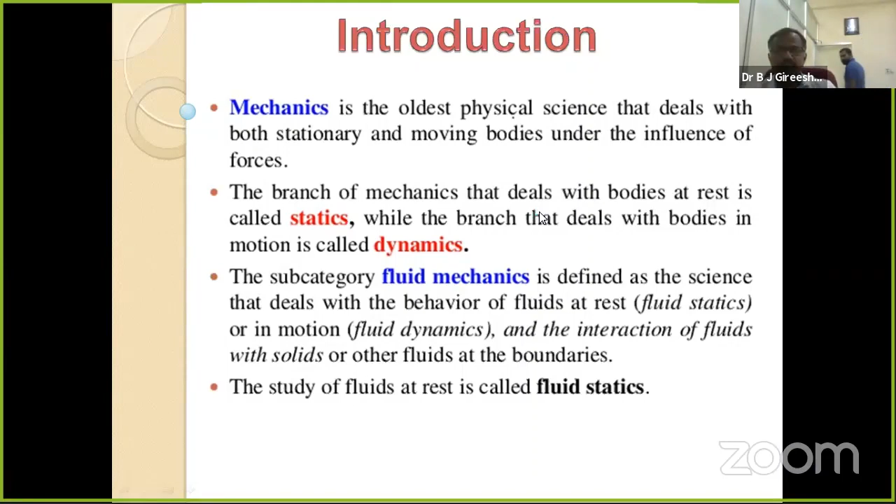So now we have to think about—sorry for the interruption—what is fluid? As you know, the substance exists in three phases: solid form, liquid form, and gaseous form. Here we are going to take both liquid and gaseous form as fluid, right? So again, fluid we are going to classify as compressible and incompressible.

Compressible is taken as gaseous structure, and incompressible—liquid comes under incompressible fluids, right? So here there will be difference between liquid and gaseous state, gaseous phase. In liquids, the cohesive force is more, but in gaseous structure the cohesive force is very less.

Here deformation occurs more, but in case of solids we can't find the deformation. There will be a certain stage, up to that stage only the deformation occurs, and after that it ceases to deform. Take a rubber band—you can stretch it a certain extent, and if we stretch more, then it ceases to stretch and it breaks. This means the deformation will not take much in solids, whereas in case of fluids, it deforms continuously under the action of forces—meaning stress is directly proportional to strain rate.

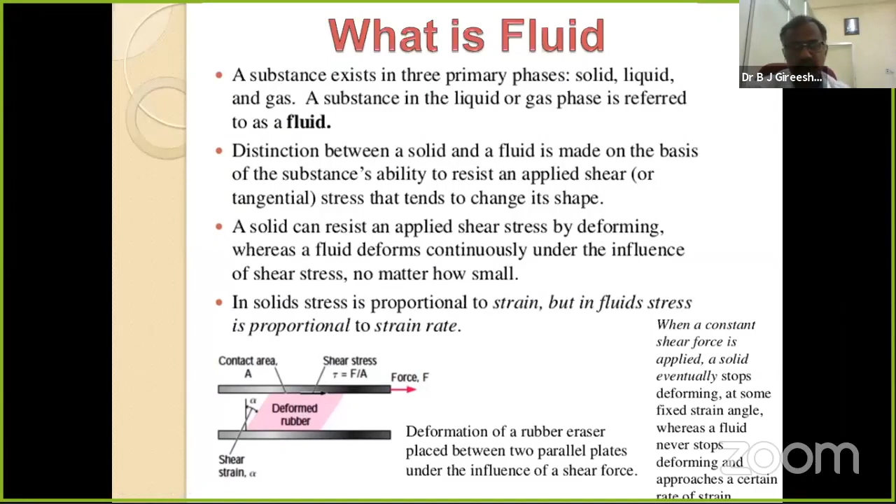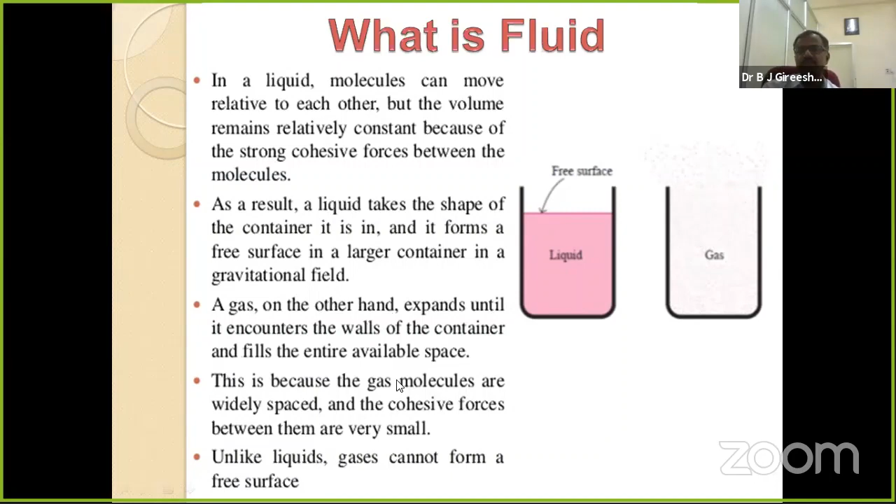I'm not going to concentrate much on what is fluid and what is gas. Fluid, or liquid, occupies the shape of the container, but space remains after its capacity. Whereas in case of gas, it occupies the whole space of the container. It has exact volume in liquid, but in gaseous state that's not possible because it occupies the whole space of the container. Those things I think you have studied, so we can pass and discuss applications of fluid mechanics in the next slides.

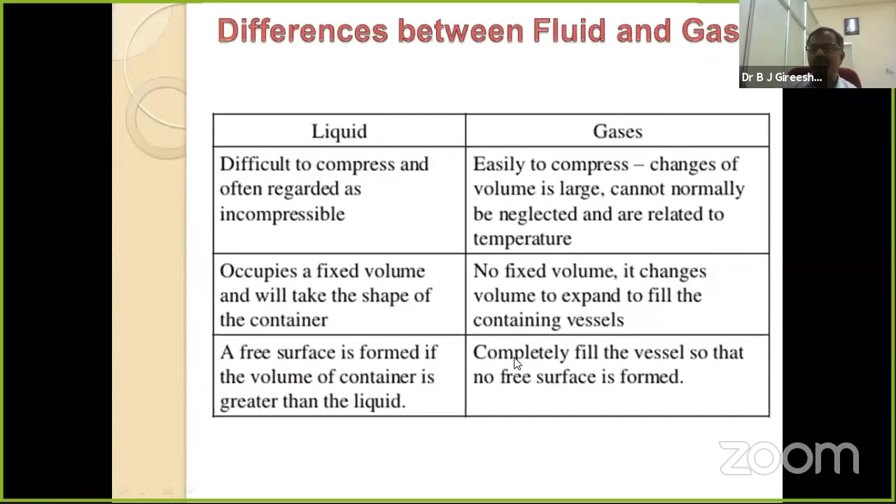These are the differences between fluid and gas. Liquids are difficult to compress, often regarded as incompressible. Whereas gases easily compress and change volume to a large extent. Liquid occupies a fixed volume, whereas gas occupies the whole space of the container. Free surface is formed if the volume of the container is larger, but in the gaseous state, it occupies the whole space of the container.

Applications of fluid mechanics. In all branches of engineering, we come across fluid mechanics. In mechanical engineering: design of pumps, turbines, air conditioning equipment, pollution control equipment, etc., and design and analysis of aircrafts, boats, submarines, all those things. Also in radiators of vehicles and bikes. So in almost all fields of mechanical engineering, it has its own applications.

Also in civil engineering: transportation of river sediments, pollution of air and water, design of piping systems, flood control systems, and others. So you can find the applications of fluid mechanics in civil engineering also. In chemical engineering too, you can find applications like design of chemical processing equipments.

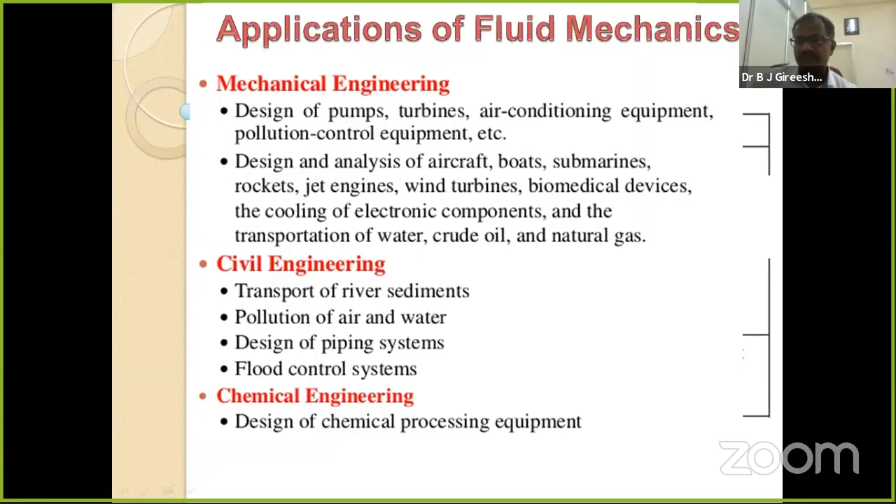In turbomachinery, in military, in automobile, in medicine field, electronics, energy, oil and gases - in all fields of engineering you can find applications of fluid mechanics. At last, everything in our world is either in contact with, or in the form of, liquid or gaseous state. That's why fluid mechanics is a very important branch in the field of mechanics as well as physics and mechanical engineering. It is a very important branch.

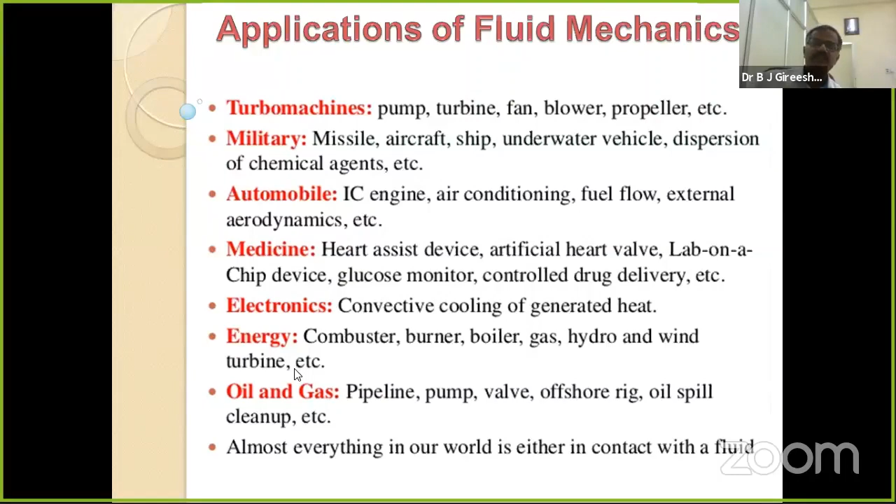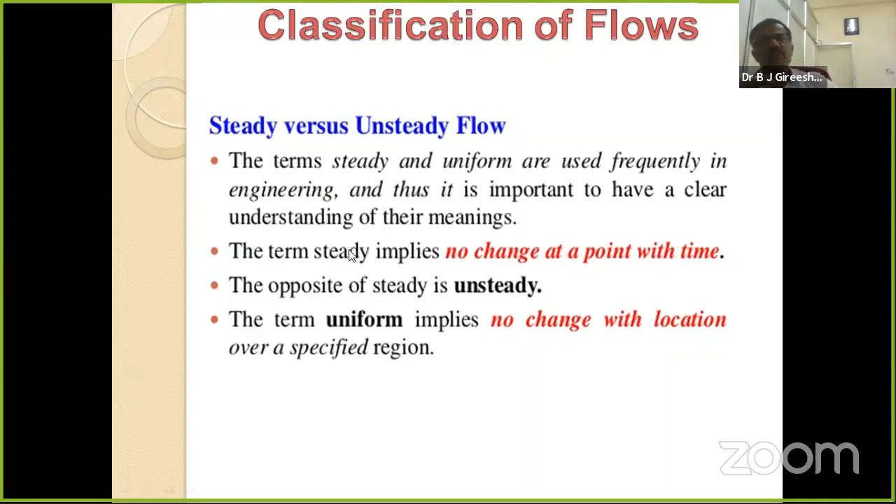Now we can classify the flows. To study this, we have to classify. There are majorly two kinds: one is steady flow and the other is unsteady flow. Steady flow means the flow parameters like velocity, temperature, density, viscosity, pressure, and all those things do not depend on the time variable, do not change with the time factor - that flow is known as steady flow. If they depend on the time factor, then it is known as unsteady flow. The term uniform flow means no change with location over a specified region, and that is so-called uniform flow.

You can find different kinds of fluids: ideal fluid, real fluid, Newtonian fluid, non-Newtonian fluid - different kinds like that. Ideal fluid is only imaginary, you can't get it, because it should not have any viscosity, so there will be no viscosity. It is not possible to find a fluid with no viscosity, but for the sake of reference we consider water. But even water has some sort of little viscosity, though it may be very less. That's why it is only an imaginary fluid.

Real fluid means any fluid which possesses viscosity is known as real fluid. Newtonian fluid and non-Newtonian fluid - the classification depends on Newton's law of viscosity. What do you mean by Newton's law of viscosity? The shear stress is directly proportional to the rate of shear strain. Then you should know what is stress and strain.

What is stress? Stress means the capacity of the force developed per unit area of the body, the capacity to develop unit force in the given body. Because if you stretch a rubber, it has to take the original shape. To take the original shape, it has to develop the internal force to get the original shape. That is so-called stress.

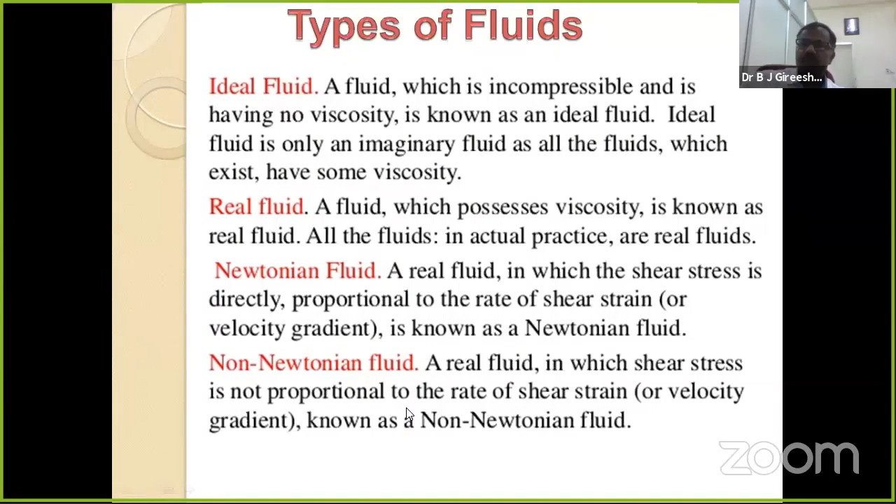Non-Newtonian fluid, right? Next.

To study the flow patterns, you should know what are streamlines, vortex lines, streak lines, timelines, and those things. Streamline means if you draw a curve for the particles of the fluid, the tangents to that curve at each and every point will be in the direction of the velocity vector.

If you draw a curve in the fluid, the tangents to it at each and every point of that curve should be in the direction of velocity. Then we call that line a streamline. If the direction of the tangents is in the form of the vorticity vector, then it is known as vortex lines, okay, like that.

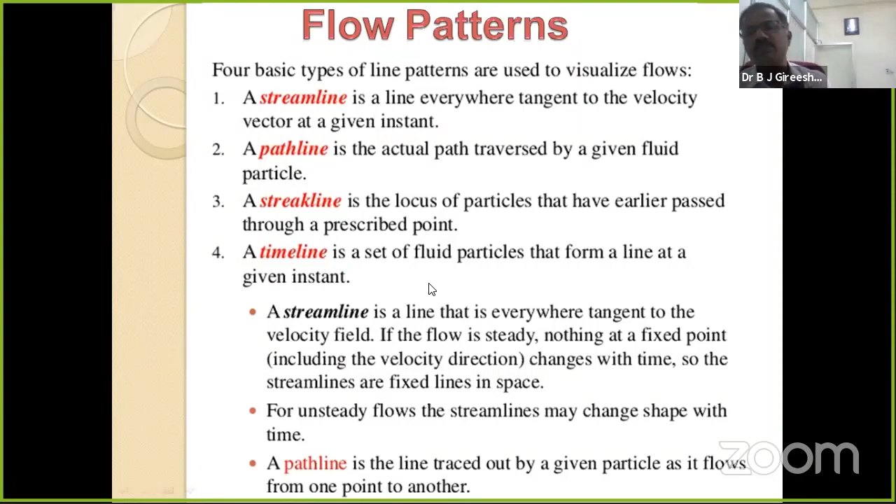So streamlines, path lines, streak lines, timelines—we take these different concepts because to study the flow patterns, they are very important concepts. Next, please.

Now come to the basic equations of fluid mechanics. For the beginner's purpose, I'm going to take only two equations: one is the continuity equation and the other is the momentum equation. I'm not going to take the energy equation, magnetic induction equation, concentration equation, and all those things, to explain in a simple form.

One is the continuity equation: mass can neither be created nor destroyed. It is given by del rho by del T plus divergence of rho into V equals 0, where rho is the density of the fluid and V is the fluid velocity.

The momentum equation is given by: the sum of the forces acting on the fluid must be equal to 0. The resultant equation is given by rho into del Q by del T plus Q dot del of Q equals minus gradient of P plus rho into G plus mu into del square Q.

I think you know the terms, each and every term. Rho is density, Q is taken as velocity of the fluid, and P is the pressure. G is the gravitational force and mu is the viscosity term. The first term del Q by del T gives the momentum term, Q dot del of Q gives the inertial force, gradient of P gives the pressure force, rho into G gives the body force, and mu del square Q gives the viscous force.

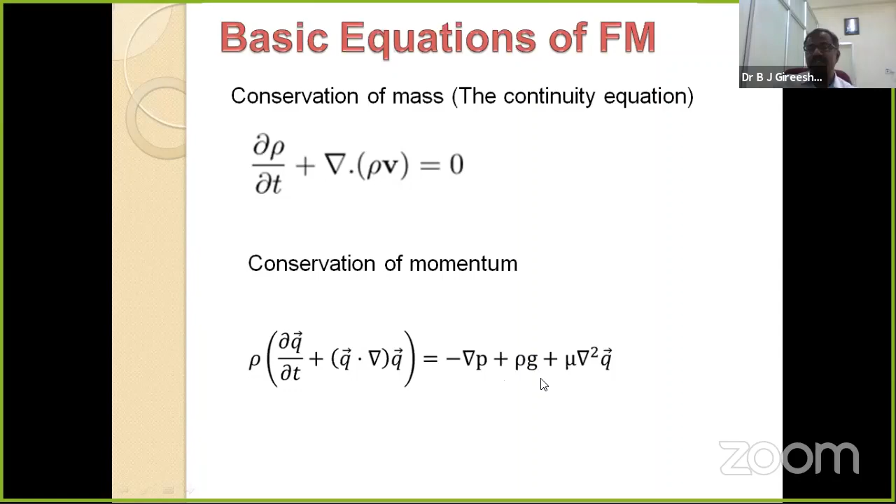So the best example is the Couette flow. Next please. The Couette flow is the first solution for this equation. It is named in honor of the mathematician. He was the physics professor at the University of Angers, from France, in the 19th century. He found the solution for this equation under some restrictions.

So what are the restrictions? He formulated the problem such that the fluid is viscous and the flow is between two infinite plates, where one plate is moving and the other is constant. Or you can take both plates as constant also, that also becomes Couette flow. But to trigger the flow, there will normally be a pressure gradient. By not considering the pressure gradient, just by moving the plate, we can trigger the motion. That's why he has taken one plate moving and the lower plate stationary, then the flow takes place, and we can see how the flow pattern will look like. Next please.

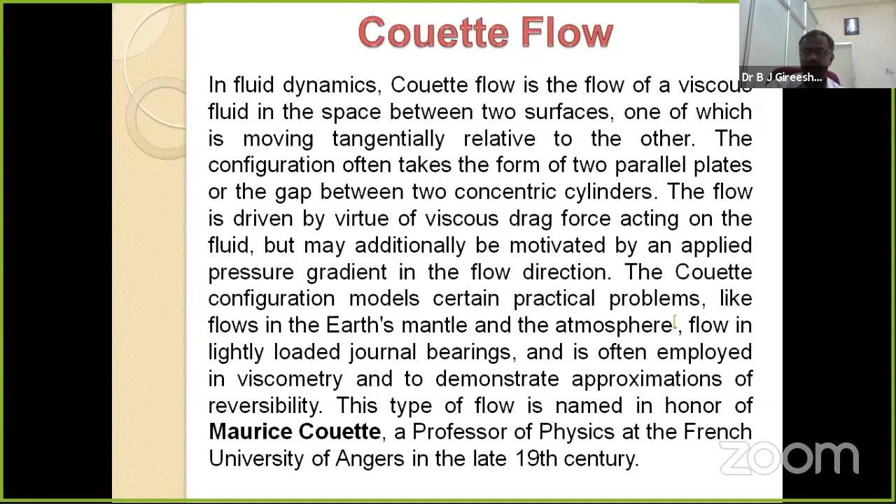So you can see here, one upper plate is moving with capital U, uniform velocity, and the lower plate is stationary. Between the two plates, they are separated by a certain distance h.

Here the pressure gradient is absent, there is no inertial force, no time variable since we have taken steady flow, and the gravitational force is absent, meaning conservative body forces. So the original equation reduces to only the viscous term: mu into del square Q is equal to zero.

But in Q, you can find three parameters: U, the velocity component along the x-axis, V along the y-axis, and W along the z-axis. Here we are studying flow that takes place only along the x-axis, so there is no V or W, meaning Q becomes U into I only.

U is a function of four independent variables: time and position variables x, y, z. The length of the channel is not known, it is infinite length, so I'm not considering that variable. The depth of the channel is also not known, so I'm not considering that either. I know only the width of the channel, so there is only one variable, and it is time-independent because it's steady flow. That's why it is a function of only the width of the channel.

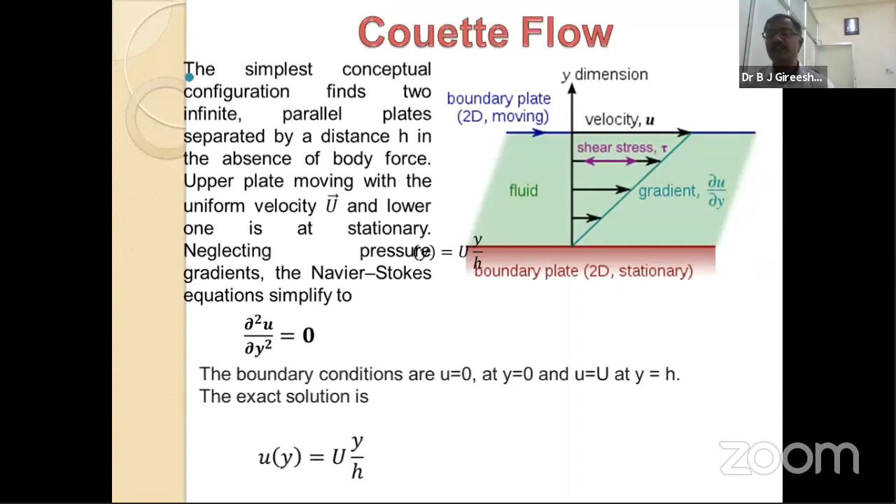Next, you can study this further by increasing the complexity of the concepts, like considering a pressure gradient, or gravitational force, or taking unsteady flow. By complicating the equation further, mathematicians and physicists try to find the analytical solution in different forms at different stages, and they find the solution.

Next, please. Again, Couette flow is taken, but now the pressure gradient is considered.

Plate is moving, the flow is triggered by the plate, but here pressure gradient is also considered. By taking the pressure gradient into account, the equation becomes a little different. Because pressure gradient comes into the picture, it's a non-homogeneous equation. You get del square U by del y square minus P by mu, where P is taken as a constant pressure gradient.

Now the equation reduces to a non-homogeneous ordinary differential equation, and the boundary conditions are the same. At the lower plate, velocity is 0. At the upper plate, it equals the velocity of the plate.

By solving the equation, you can find the solution at the last, U(y) is equal to like that. Here there will be one small mistake at the last term: small u into capital Y by h, but that is not small u. That will be capital U into Y by h.

So if the pressure gradient is absent, meaning P is equal to 0, then the solution is valid with the previous one. If P is equal to 0, then only the velocity term capital U into Y by h remains. It is nothing but the previous Couette flow.

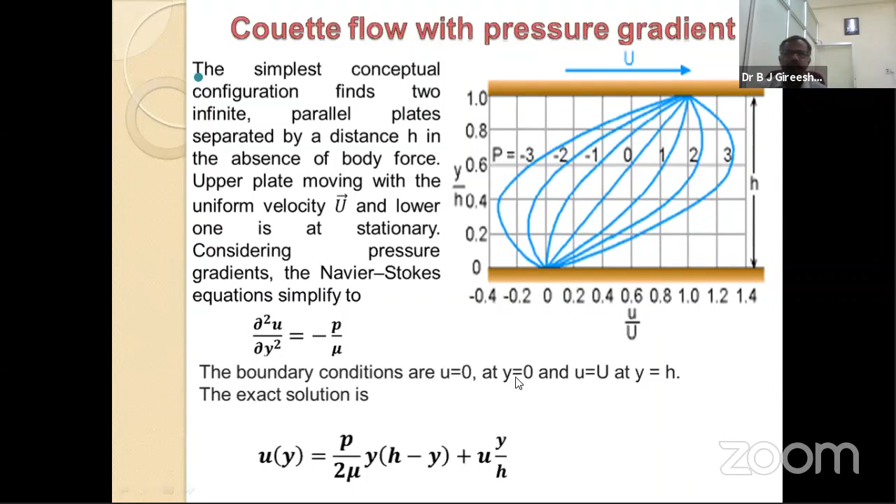Next, unsteady Couette flow. Up to this stage, we had increased one parameter, that is pressure. In this problem, we increase one more parameter, that is the time variable. In those two studies, we only come across ordinary differential equations.

But here, the independent variables are more: one is the position variable y, and one more is the time variable t. Now the equation becomes a partial differential equation, and we have not taken any pressure gradient. If we take pressure gradient, it becomes a non-homogeneous partial differential equation, much more complicated compared to this problem. Here the pressure gradient is absent, it's simply an unsteady problem, so the equation becomes a second order partial differential equation, homogeneous and linear.

Since it is homogeneous and linear, we can find the solution very easily using separation of variables, Laplace transform method, Fourier transform method, eigen expansion method, or any kind of such methods. So you can find the solution.

You can observe that when the time variable comes into the picture, there will be an initial condition along with the boundary conditions. The initial condition is at time t=0: we have not started the flow, so the velocity is 0. That is, u(0, y) is equal to 0. That is the initial condition, and the boundary conditions are the same as in the previous cases.

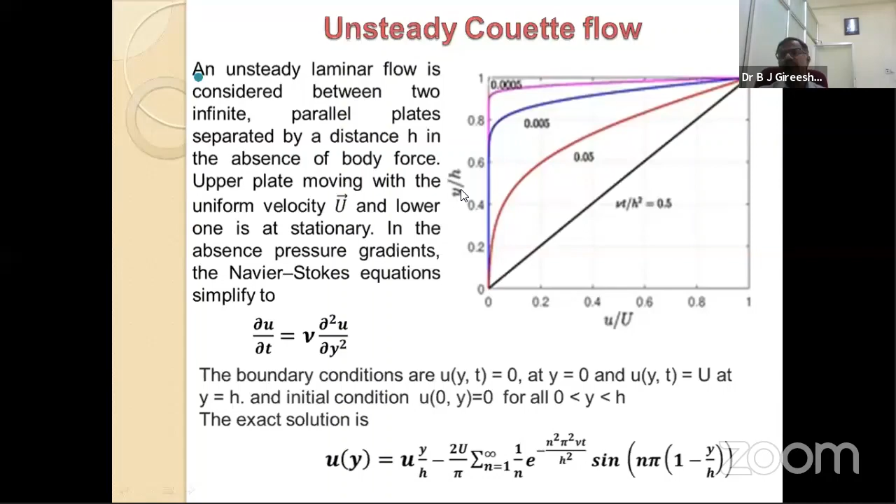So you are going to get the same equation, but in the form of polar coordinate system, cylindrical polar coordinate system, and the flow pattern must be the same. Poiseuille flow, plane Poiseuille flow, Hagen-Poiseuille flow, and all those things are related to Couette flow only.

But Stokes considered a different problem, meaning it must be unsteady in the absence of pressure gradient, no inertial force, no gravitational force, same as in Couette flow. So the equation becomes the same thing, but here he has taken only the lower plate, no upper plate.

He has not taken the upper boundary. There, y is equal to 0 and y is equal to h, but his h is not there. It is open space, only the lower plate is there. At y equal to 0, but at the top y tends to infinity, meaning we don't know the height of the channel. Then the boundaries become different.

He has taken u of y comma 0 is equal to 0, that is the initial condition, and u of 0 comma t, meaning exactly at the surface, it must be equal to the velocity of the plate. That's why the plate velocity is taken as capital U. Only at the bottom the plate is moving.

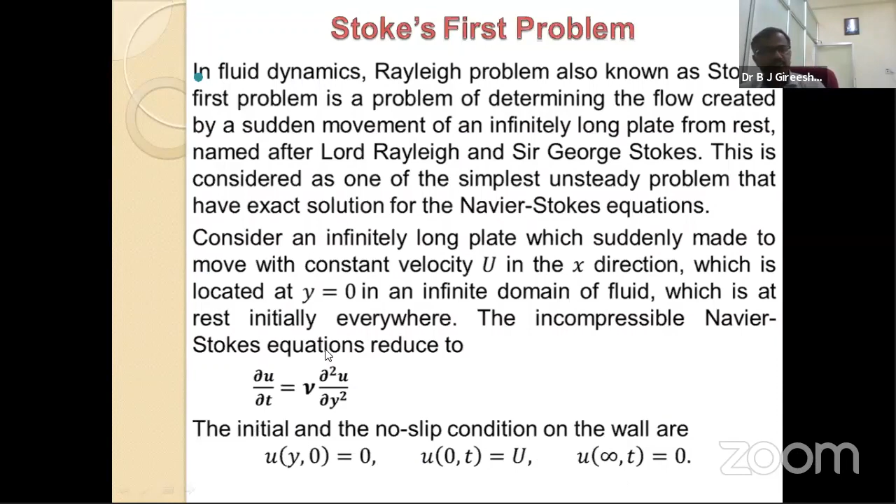By solving this equation, you are going to get the solution. But to solve this equation, they have adopted a different method. You can use any method, but they used the self-similar variable method, meaning similarity transformation method.

We define a new variable with two variables x, y and t. We define a new variable eta, given by a certain expression. By defining those variables, the partial differential equation reduces to an ordinary differential equation, that is f double dash plus 1 by 2 into eta into f dash equal to 0. This is a second order ordinary differential equation with variable coefficients, not constant coefficients.

If they were constant coefficients, it would be very easy to find the solution by finding the characteristic roots of the polynomial. But here, with variable coefficients, it is a little difficult compared to that.

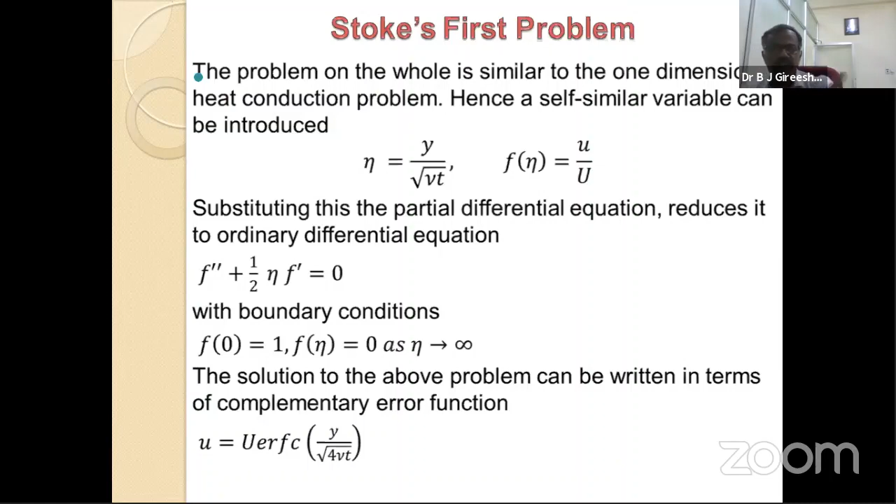So before going to this, I think one guy from Andhra Pradesh called me 3 days back regarding the elliptical boundary conditions. Sir, if the region is rectangle, no problem, we can find the boundary, we can fix the boundary. If it is square, we can fix the boundary. If it is cylindrical, circular cross section, then we can fix the boundary. Then if they don't have the circular or rectangular shape, then what we have to do?

Like the cross section is elliptical form, cross section is hyperbolic form, cross section is triangular form, cross section is parabolic form, then the flow pattern becomes different. Because in circular case, as radius changes at every point, it denotes at each and every point. In ellipse, there will be 2: one is major axis and another one is minor axis. In the similar case, hyperbola also. In triangle, for this side is different, for this side is different, and for this side is also different. That's why you can find different boundary conditions there.

I had these boundary conditions in one more slide. Actually, that is not shared here. I don't know, at the last I will try to show you how you have to consider the boundary conditions for those also. Actually, those who want, please go through with Y.B. Reddy, he has published the paper.

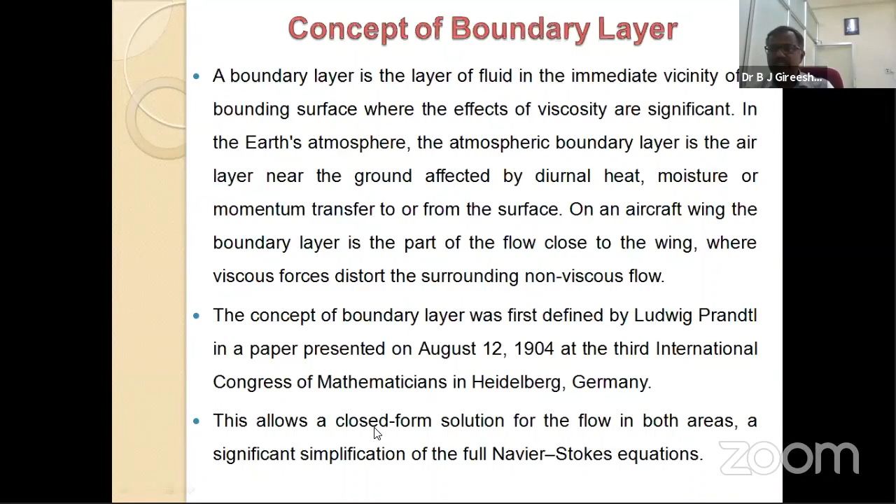Using these concepts, he derived new equations, using the same Navier-Stokes and momentum equation. So he reduced the equation into certain boundary layer equations. Let us see how they are. Please, next. Boundary layer, next please.

So I'm not going to show all those things because it's a big calculation. He reduced the equation into this simple form. Even this is also a non-linear partial differential equation. Observe the second differential equation - that is a non-linear second order partial differential equation. Itself, this is also difficult to find the solution. But he has not succeeded to find a solution for this equation.

But his student, Blasius, in 1908, reduced this equation to some easier extent, and then he found the solution, and that is known as Blasius solution. Blasius was the student of Prandtl.

So in 1908, for this equation, he tried to find the solution, but he reduced the solution to some extent, meaning he assumed that capital U is constant, then the term disappears for that equation. So he found the solution using method of series solution. That is also not fully closed form solution. He found only a series solution, semi-analytical solution, in the form of series. Blasius only found the solution in the form of series in 1908.

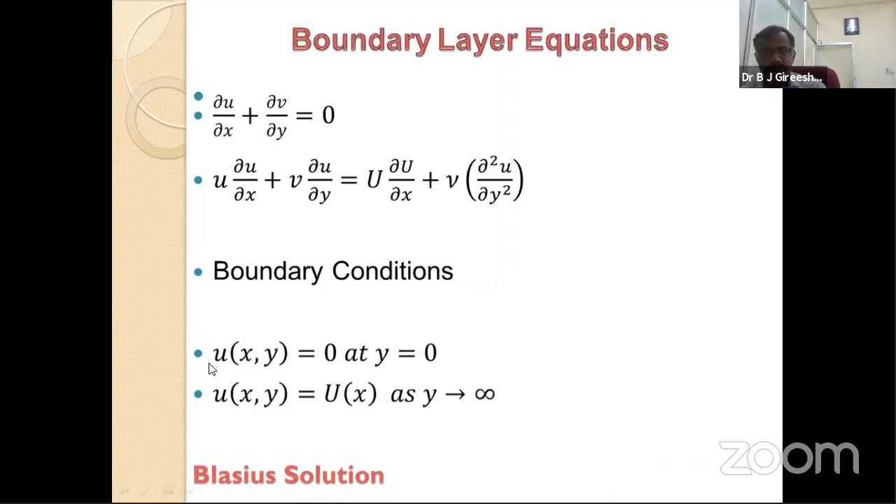So now, based on these equations, Stokes found the solution for the flow problem. Here, instead of taking the simply moving plate, he has taken the oscillating plate, with some oscillation omega - omega is the frequency of oscillation. So that oscillation is considered as U into cos omega t in x direction. This is the plate, so it is oscillating. Due to this oscillation only, the flow takes place, and for that flow he found the solution.

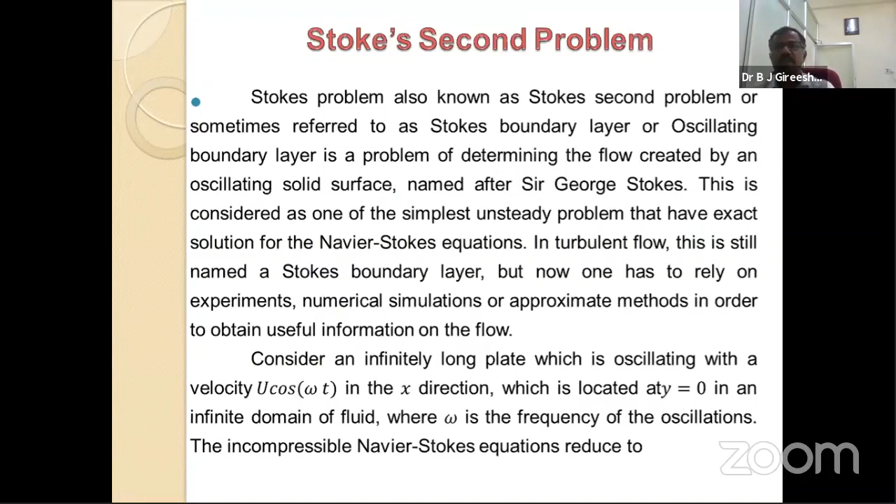So here, second order partial differential equation, homogeneous only, but the boundaries are different. There, U of 0,t is equal to capital U, but here it's capital U into cos omega t. And in the potential flow region above, as y tends to infinity, the velocity is 0, meaning the fluid does not experience the motion of the lower plate, because here only the vibrations take place at the bottom, not at the top. So those vibrations do not disturb the surface of the fluid at the top level, right? That's why the velocity is 0.

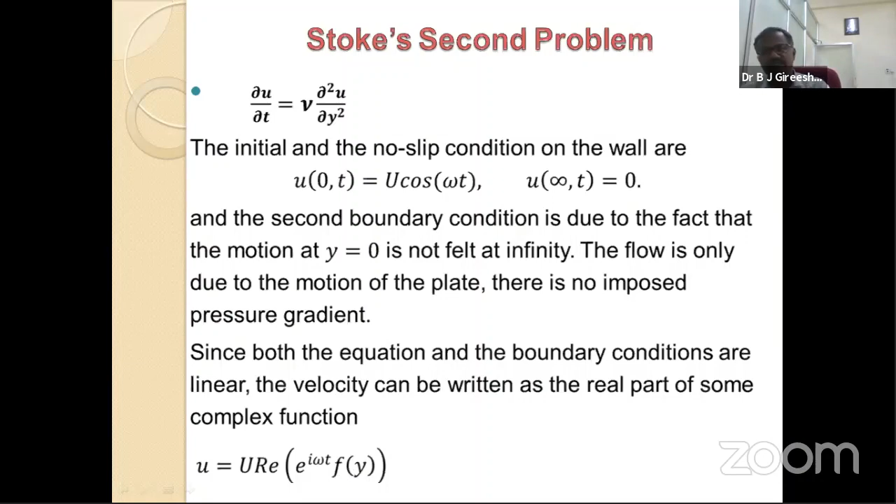To find the solution, you can use any method, but he used the method of separation of variables. For that, he wrote the solution as U into real of e power i omega t into f of y. E power i omega t is a function of t, and f of y is a function of y only. E power i omega is a known function, but f of y is an unknown function to be determined - we don't know what is f of y. By substituting this equation into that second order differential equation, he found the solution.

So in the form, U of y comma t is equal to capital U into e power so and so, into cos of that, and the flow pattern looks like this. So you can see the flow pattern there. This is about the Stokes flow problem, the Stokes second problem.

Like this, we are going to complicate the equation and study the problem. In the medicine field also, to take the medicines you have to study the flow pattern. To measure the blood pressure, you have to study the flow pattern. In every field, you have to study the flow pattern. In engines, car engines mainly, there's the radiator - to cool the engine, we should have the radiator. That radiator cools the engine, but in the radiator, purely the mechanism is due to the fin structure. The fin structure is the best example, and also in the radiator and also in centrifugal modes. So wherever, these all depend on the motion of fluid, meaning fluid mechanics concepts.

Let us see how we can study the concept of fin structure using fluid mechanics, so we can see the application of fluid mechanics in mechanical engineering. I'm going so fast - with that fin structure, I think some of you may have heard that lecture already. Let us see those who have not heard. You can see how we can use the concept of fluid mechanics to study the heat resistance, the cooling of the engine using fluid mechanics, with simple equations.

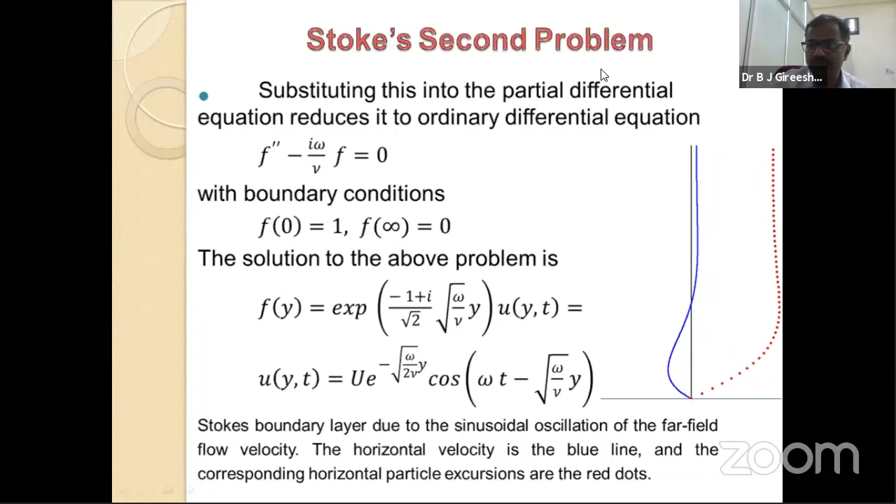Is it visible? No, sir. Then what do we have to do? Otherwise, send me the file, I'll share this. Oh, it will take time. 1 minute, I will try. I will send it, and meanwhile I'll explain the introduction. So you can share that video also, right?

Sir, which one? The previous one, sir? One minute. So please tell me your email ID, to send through WhatsApp, sir. Through WhatsApp, it's okay, no problem.

Rakesh. I request participants to post the questions in the YouTube chat box. Email, we can discuss.

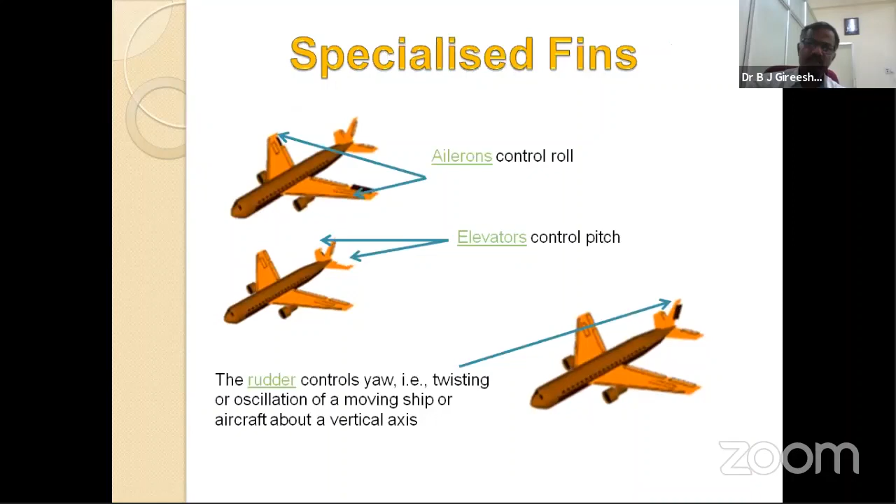These fin structures are used to reduce the heat of the body, I mean heat from the engine. Otherwise, if the heat increases, every metal has its own melting point, and after that melting point, it's going to melt. That's why we have to reduce the heat, to avoid the heat, I mean to maintain the heat of a particular engine.

So we are going to use the fin structure, and the structures are in the form of rectangular. You can find rectangular, triangular, pin shape, radial shape, like that. Different shapes of fin structures have different performance. One shape is very good to reduce or enhance the heat, one structure is not good to enhance or reduce the heat. Let us see later.

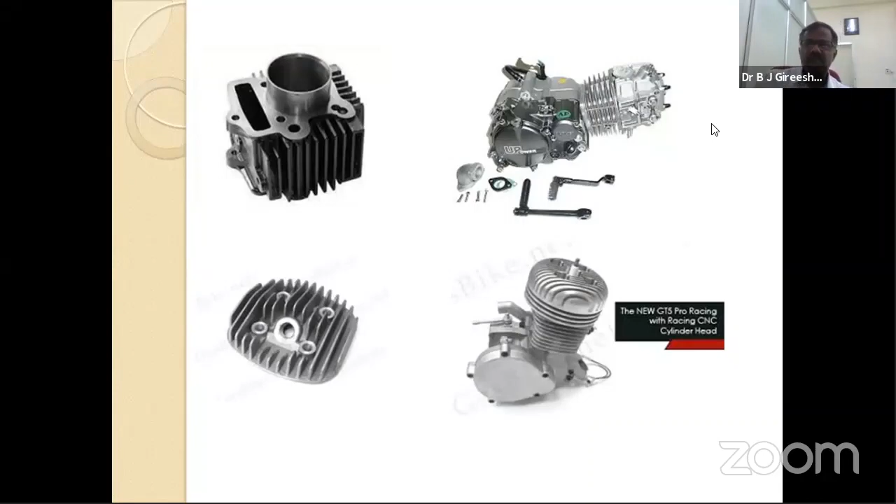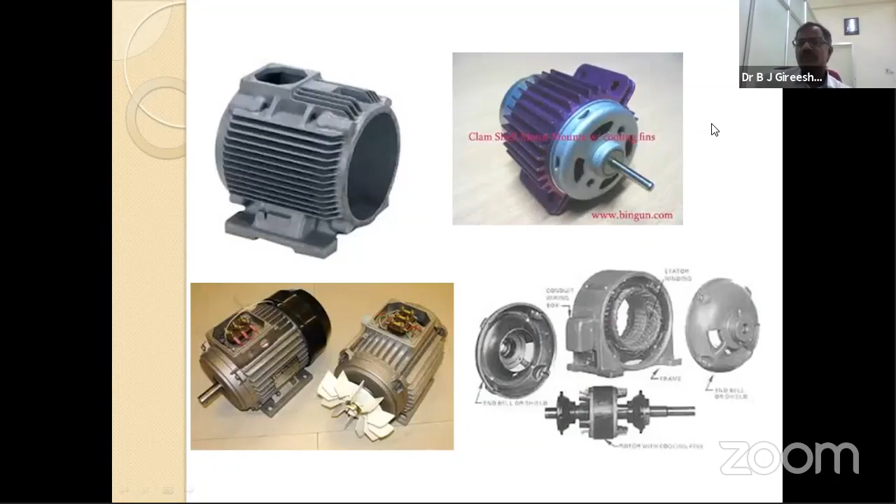But these fin structures are allowed in the air, because air passes through between these fin structures, and due to convection, the temperature reduces because of the air passing through these fin structures. Due to conduction, the heat from this body transfers to these fin structures, and due to convection, the temperature reduces.

This process goes on, it is a continuous process, and due to reduction in the temperature, this body gets cooled, maintained at some constant temperature, right? So this is the concept. Let us see next, but here we have taken a simple example.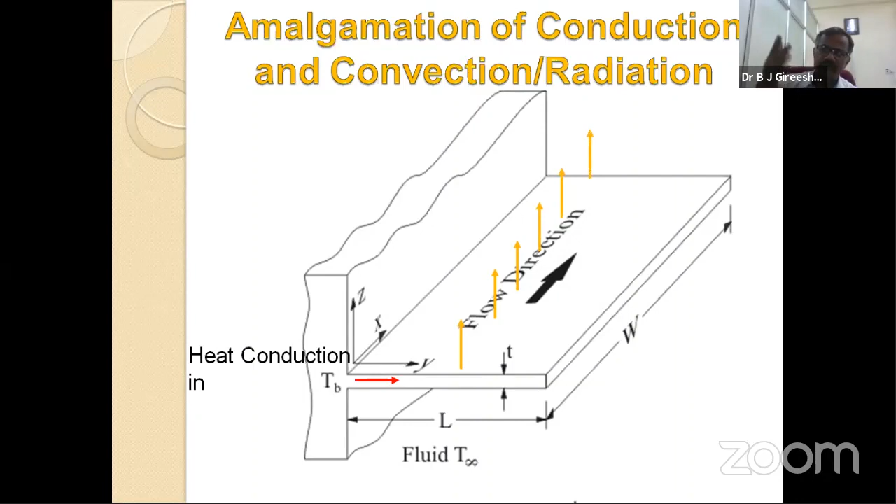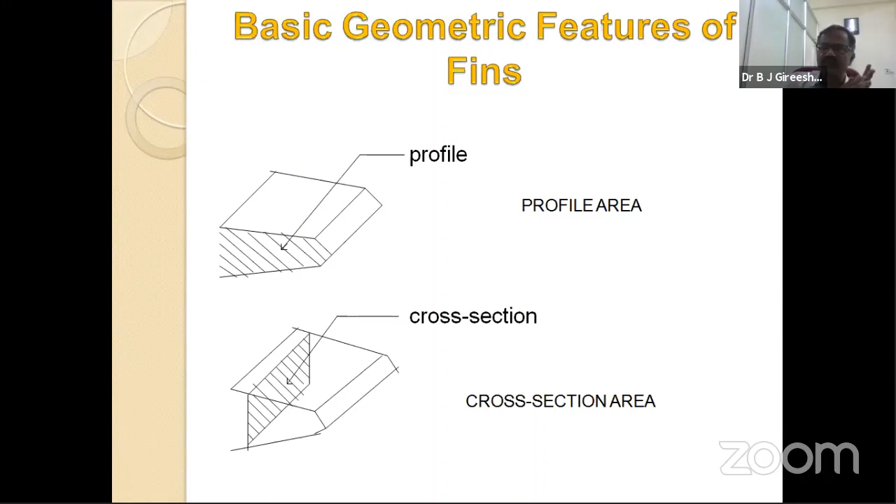So we can see different shapes of fin structures. I am not going to concentrate on those things. My intention is to give one simple example.

So here, by using Newton's law of cooling, we are going to formulate the equation, the practical problem into mathematical form, and that mathematical form gives the second order ordinary differential equation. We are going to derive this equation, and by solving it, you can get the solution, which gives interpretation of how the temperature is reducing or increasing.

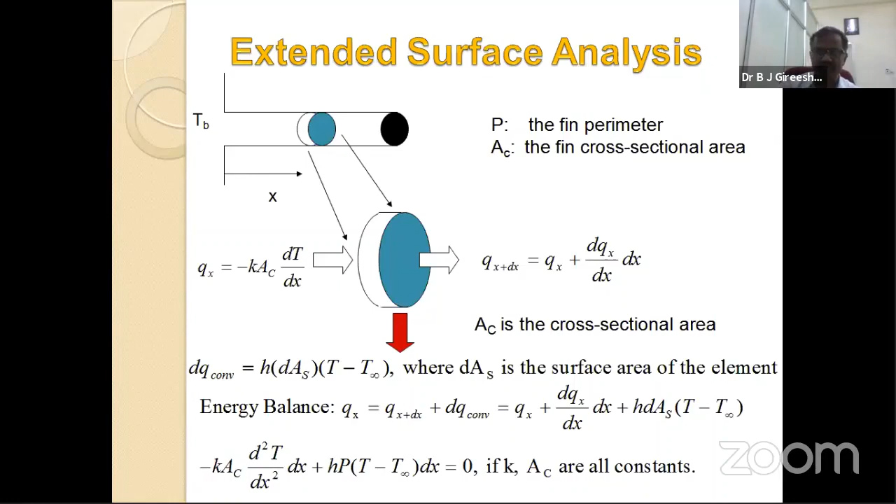Let us see the importance of fin structures. Next please. So here the equation is reduced and the solution becomes: QF is, Tx minus T infinity divided by Tb minus T infinity is equal to like that.

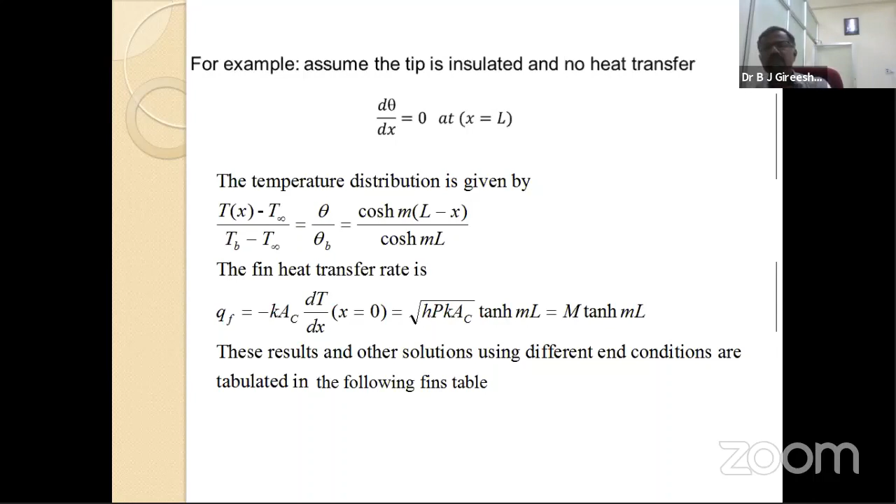That will become the solution, but the solution depends on the boundary conditions. You can take insulated boundary condition or different boundary condition, meaning the tip is insulated, not insulated, or maintained at some temperature. We take different assumptions, and those assumptions give different boundary conditions. Depending on those conditions, we can see the solutions.

Here you can see the solution for different boundary conditions. The middle and second columns give the solution for the boundary conditions in the first column: convection heat transfer condition, adiabatic condition meaning insulated, and specified temperature. At a given temperature, you get a different solution. The general solution is the same, but for the particular solution, to remove the arbitrary constants, you should know some boundary conditions.

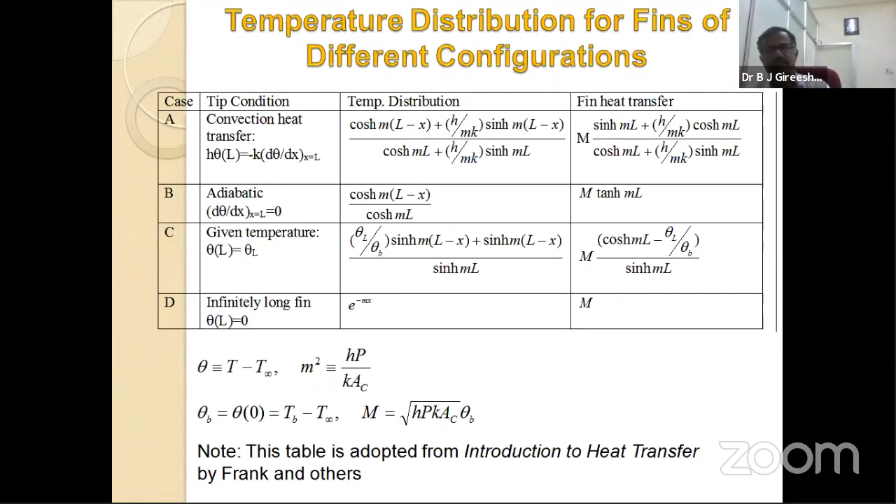Depending on these, we are going to study one simple example. So there we can see, one pot is there, and in that pot we are boiling water. That pot contains a handle of certain length, 20 centimeters long and 3 centimeters wide. So the length of the handle is 20 centimeters, width is 3 centimeters, thickness is 0.5 centimeters, and the other parameters are given.

And the metal is aluminum. And the water is boiling at 100 degrees. Boiling means it will be at 100 degree Celsius only. So certainly the heat transfers from the pot to the handle, is it right? Pot to the handle. But at 100 degree Celsius, is it possible to touch the handle or not?

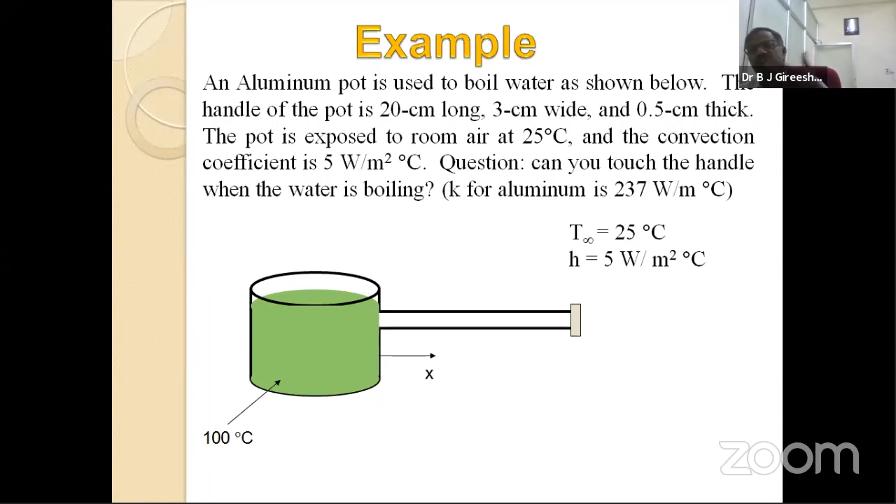We have to study what is the temperature at the handle. As the length of the handle increases, easily you can say the temperature goes on decreasing, because exactly at the handle at the wall, the temperature is more. As the length increases, the temperature goes on decreasing due to convection only, because air is circulating over this.

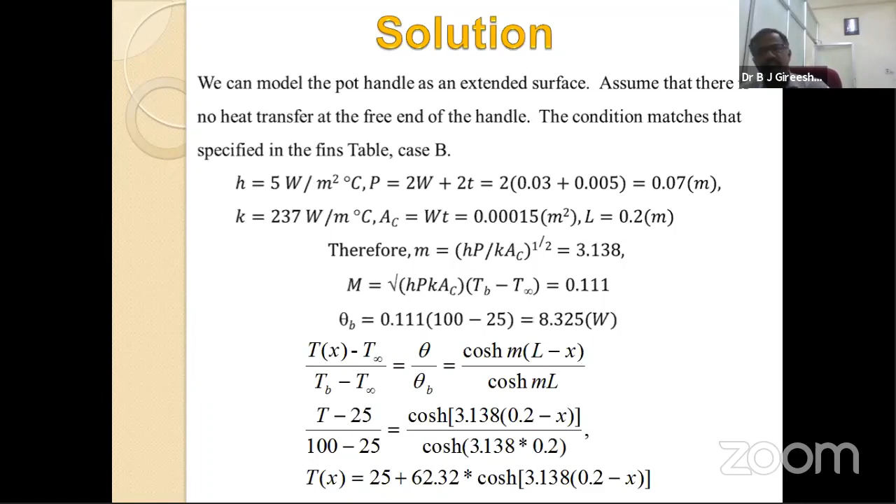So for this formulation, we found the solution, same equation, same solution, but here specified parameters are given. By substituting those parameters in the equation, we can find that. The solution gives the temperature distribution pattern: as the length of the handle increases, the temperature goes on decreasing. Exactly at the wall surface, here 100 degree Celsius, because it meets the boiling temperature. Exactly at this point the temperature is 100 degrees, but as the length of the handle increases, temperature goes on decreasing.

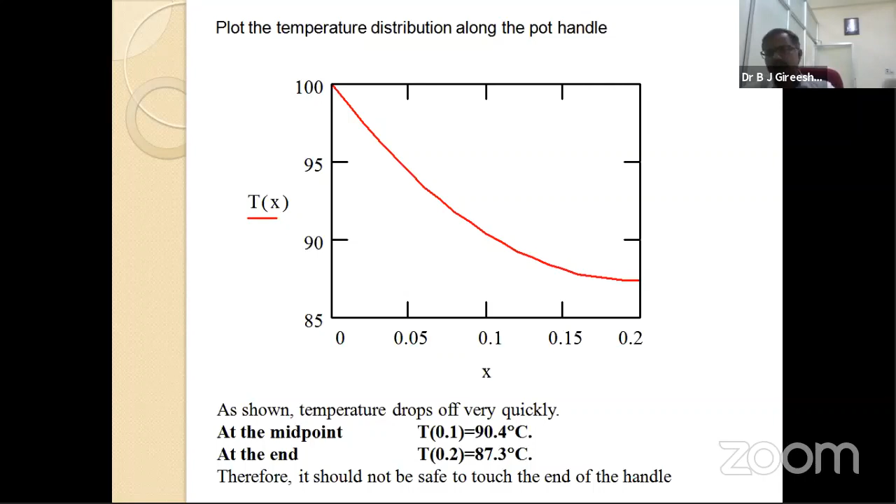So instead of taking aluminum, if we consider stainless steel, then what happens? How does the temperature distribution take place? Here the conductivity parameter is different. Everything else is same -- length of the handle, thickness, width -- only the metal is different. Instead of aluminum, I have taken stainless steel. The thermal conductivity parameter is more for aluminum, conductivity is more in aluminum compared to steel. So by substituting that parameter K in the equation, you can see that.

Exactly at the wall, temperature is 100 degrees Celsius, but as the length of the handle increases, the temperature goes on decreasing, and at the end it reaches a temperature of 37.3 degrees Celsius. In aluminum it was about 87 degrees, but in the case of steel it is around 37 degrees. So it is a simple calculation, and it agrees with the practical also -- the experiment also obeys this.

That's why we can use the concept of fluid mechanics to study these fin structures. They have many applications in real world problems. I'm not going to explain all those things -- it is one of the best examples, best applications of fluid mechanics in the field of mechanical engineering.

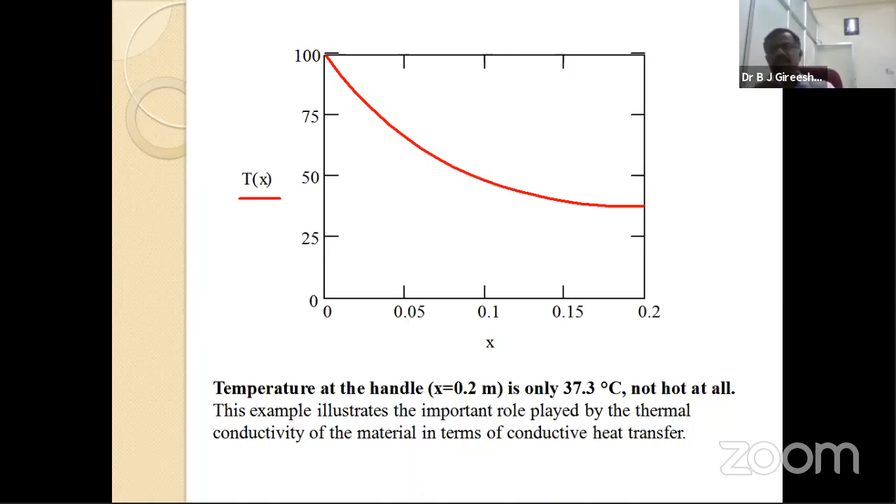By this, I'm going to stop my lecture. If you wish to ask any questions, feel free to ask, right? I'm not going to concentrate much on these things, because it will take much time.

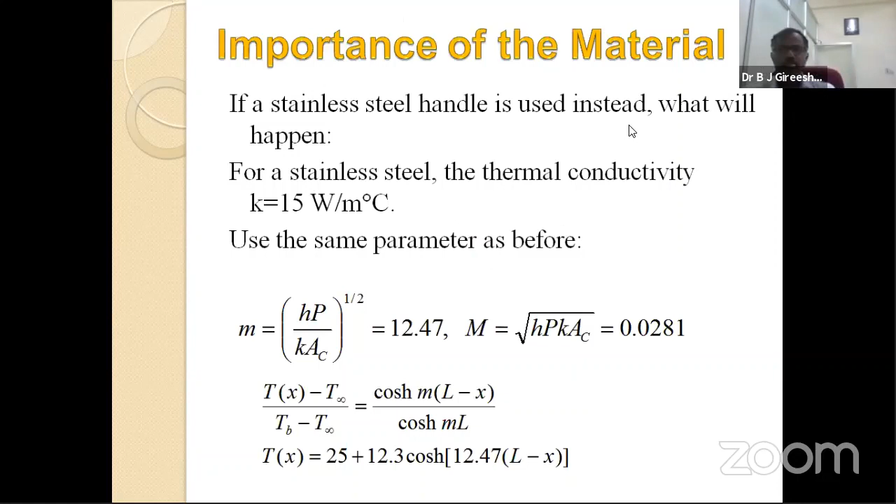Hello. Hello. Hello, am I audible, sir? Sure. And one participant is asking -- yeah -- how to choose eta? F of eta will take, sir.

Eta, F of eta -- to choose eta, you have to go through similarity transformation techniques. So one similarity variable will not work for all variables. For a particular problem, you have to take a particular similarity variable. To choose a similarity variable...